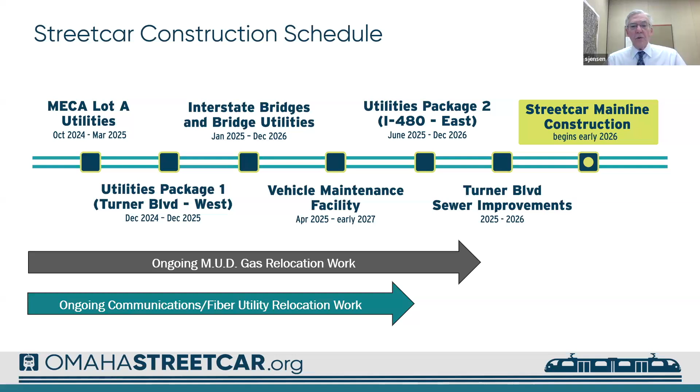So with that, I'm going to turn it over to Megan to talk about MUD. Good afternoon, everybody. Thank you, Steve.

MUD crews - we currently have 2 crews working along 10th from Douglas to Harney and in Harney west of 10th. Since the work is weather dependent, delays or changes in the schedule might happen due to weather conditions. But phase 3 is what we're currently working on right now. Parts 2 and 3 are being performed simultaneously to speed up the work. Most of this work is taking place down the middle of 10th and in Douglas east of 10th Street. Parts 2 and 3 should be completed within the next 3 weeks.

The only planned gas shutdown will be to reconnect 2 customers' gas services near the work, and the shutdown will affect only those customers.

MUD will soon be in contact with those two. After parts 2 and 3 are completed, the crew will move to part 4, which we anticipate starting the week of March 17th and will impact 8th Street traffic. More information on that will be coming soon.

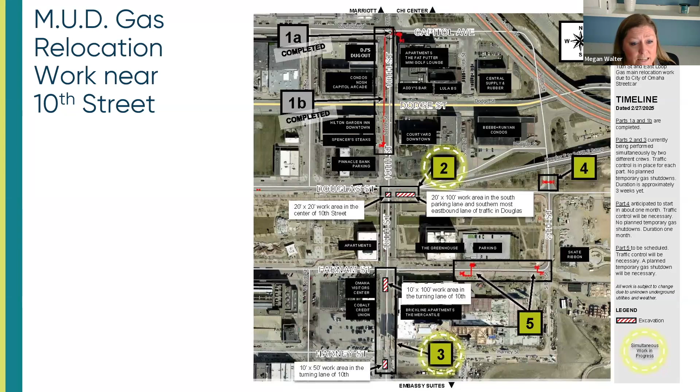MUD's Phase 6 work is currently being performed on the south side of Harney between 10th and 12th Street. The installation crew is working on installing main in this 2-block area for another month, and then will continue west to the next 2 blocks.

Another crew will start working with customers in this area to reconnect their gas services to the new main. These reconnects will include additional excavations along Harney. Customers can expect service work to start within 1 month and will include a short temporary gas service interruption for each service, but we will be in contact with each one of those customers.

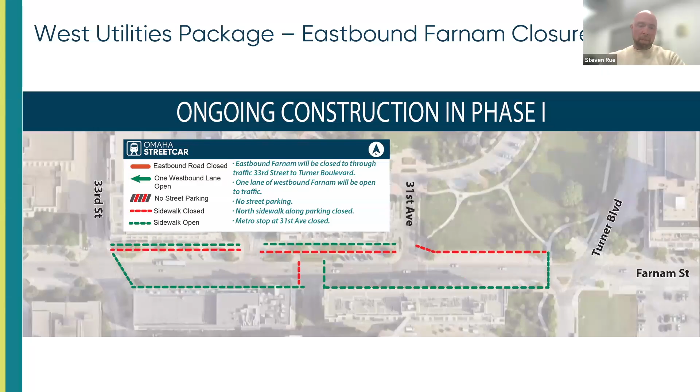Moving on, here we're showing the upcoming full closure and the current full closure we have on Farnam, as well as the upcoming one. Currently Farnam is full closure at 36th to 37th Street.

Hawkins is in there doing some deep sewer main replacement that did not allow us to maintain access through this section of Farnam for the project. This is anticipated to run through, I think, the 14th. I don't know.

We've got about 3 weeks of this work. So as this goes on, they're going to do this deep sewer main replacement here.

When this work is done, they're going to immediately flip around and do the full closure from 33rd to 34th Street. So this section will open and immediately 33rd to 34th Street will then go into a full closure. For that section, we're rebuilding some deeper sewer manholes that don't allow us to maintain traffic access during that time.

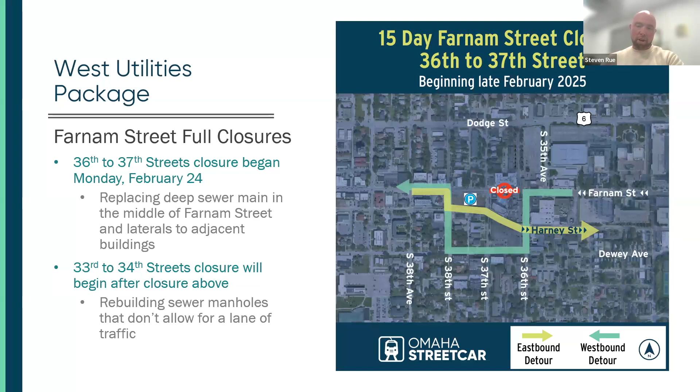If we go to the next slide, we can show some of the work and restrictions we have through this area right now, from 35th Ave through 37th Street. So again, 36th, 37th, full closure through March 14th, shown here on the slide.

We also currently, now that it is the 5th, you can see some different dates there in the alleys north of Farnam. There's some phased access, phased closures through there to do some power duct bank work that's back there. Any access to garages, things like that has been worked out with the adjacent property owners, but that's expected to be closed.

There was a planned power outage for last night that did not occur, thanks to the weather that we all saw. So that is now being pushed out to Friday from 4 to 8.

Only the businesses north of Farnam are on that. If you are affected by that, you have been contacted already. OPPD will contact you again to make you aware of that. So only those affected should already know about that closure, or about that outage.

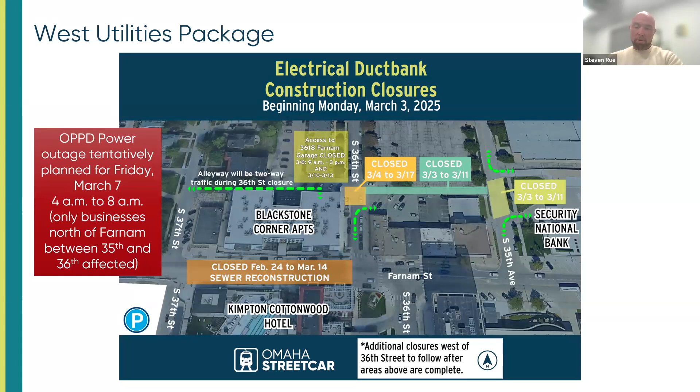So that's where we're at with those utility packages. For the bridges, as Steve talked about at the beginning of the webinar, Harney Bridge is down, which is great.

That work was originally planned for 2 weekends. Hawkins was able to complete it in 1 weekend, actually slightly shorter than that. I think 480 was open late Sunday night. We thought maybe that would go into Monday morning. So that's great, that bridge is down.

So now Hawkins is moving on to the construction of the new bridge. Right now they're out driving pile for the abutment. They have some pier removal work going on out in the middle of 480.

So there are some lane restrictions right through this section here right now, with some barricades out there. That's where we're at with the bridge.

There is some continued power duct bank work on Farnam, but there has been a lane open, reestablished for a few weeks now. That's still open. That work continues for a few more weeks, I believe, till it's complete.

But that's kind of where we're at with the bridges, just moving forward with that. Should be complete end of this year.

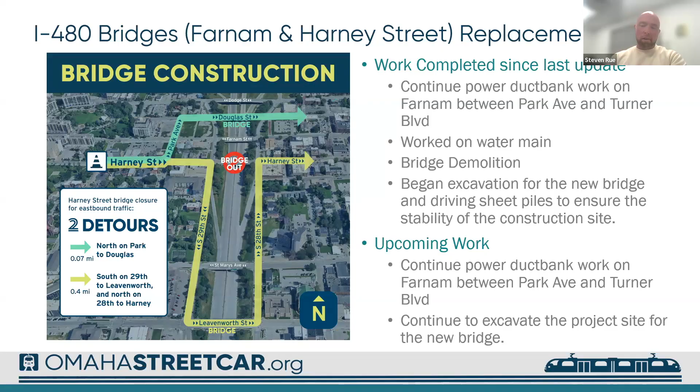So we understand the difficulties that the construction is causing and can cause for folks in the corridor and visitors. But there are a number of things that we're trying to do to support the businesses in the area. So to quickly give an overview of that, we have worked on some overall communications.

We give construction updates on the OSA website, omahastreetcar.org. We give an interactive map on the website with up-to-date information by neighborhood, so you can click on the map and find out what's happening in your area.

There's a frequently asked questions section on the OSA website, weekly construction update email newsletters, monthly construction update webinars like this. And as Wendy said, she's always available for contact if you have an individual question that she can help you with.

As far as accessibility, we have made sure that we've maintained traffic through the area, except for those 2 shutdowns that Steve just talked about.

And we are trying to limit the work to these 3 to 4 block segments for about a 3 to 4 month period for each one. When that work is going on, then in that segment, the other segments are open and work is not going on. So we've tried to limit the extent of the work at any given point in time.